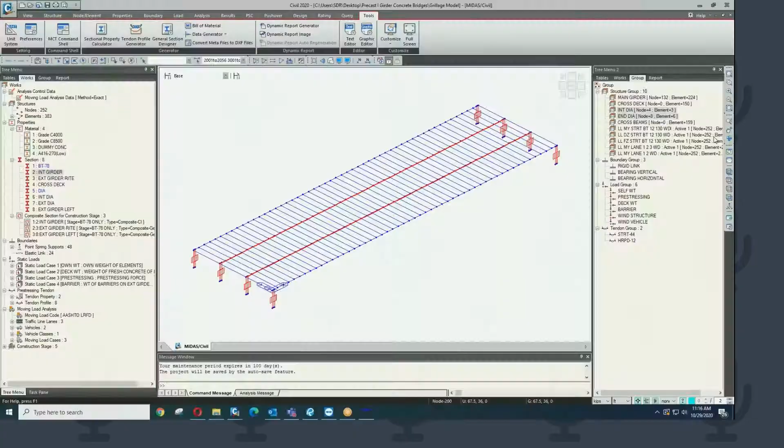Okay Hamid, thank you for your question. I think that's a very important question. Usually when you deal with composite bridges, either steel or otherwise, this issue is always something very important to consider. What stiffness are you checking your element for and under which load cases? So there are load cases where you need to check, I will not say short-term stiffness, but basically when you use the modular ratio, the regular modular ratio for the section.

What I mean by the modular ratio, of course, is the modulus of the steel over the modulus of the concrete. And when also you want Midas to understand that the long-term modular ratio should be used. So to me, when I do this thing, I usually go back to the definition of the section.

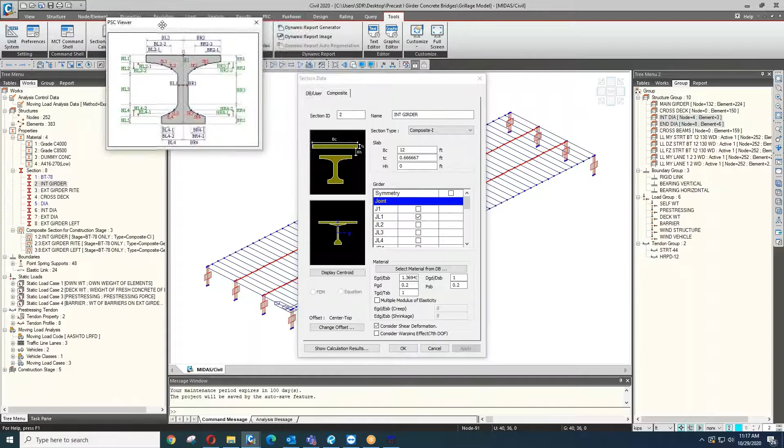Can you see my screen? Yes, I can see. So whenever we define that composite section, there is something that I think takes care of this issue that you brought up. When you define the composite section here inside Midas, you have part number 1, which is the girder section. Then you pick all the properties for the girder section here.

I'm sorry that I just jumped right away to this, but I need to give some quick introduction here, just so everybody can follow along.

So this example I'm showing you is just a precast concrete bridge, not a steel one, but I'll explain the concept and answer your question based on this bridge. This is a precast concrete bulb T section composite with the deck, and this is a cross section of the bridge. This bridge is composed of 4 girders, as you can see - those are the interior girders, and this is the exterior right girder and exterior left girder here.

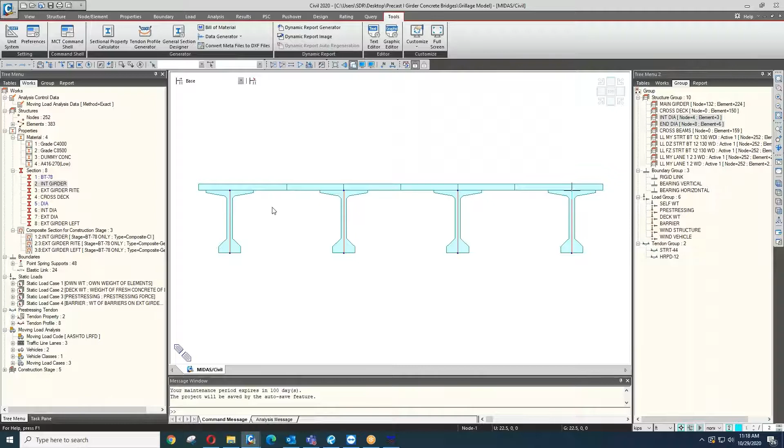So whenever I come to define the composite section here, I first define the section for the girder itself, which is the precast concrete girder in our case, and those are all the properties of the girder. Then later on, I jump to that window to define the composite section properties. Here you have the girder section properties defined, and then the slab part, which is the deck slab, with all the geometrical properties defined.

What takes care of your question is this part here - what modular ratio are you using. So this modular ratio, the modulus for the girder section over the modulus of the slab section - this modular ratio is 1.3 because we are talking about concrete here.

And this concrete, we have a grade for the pre-stressed concrete - this is 8.5 KSI, and for the slab it's 4 KSI. So that's why you can see the ratio is 1.36, but for steel it's going to be something on the order of 7 or 8 or whatever, depending on the concrete modulus you're using for the deck.

So this number here takes care of the short-term analysis or the short-term stiffness. So if I go now and analyze this bridge - I defined everything in this model, including the dead load, the live load, and the construction stages - if I run this model, this means all the cases are going to be checked for this short-term stiffness.

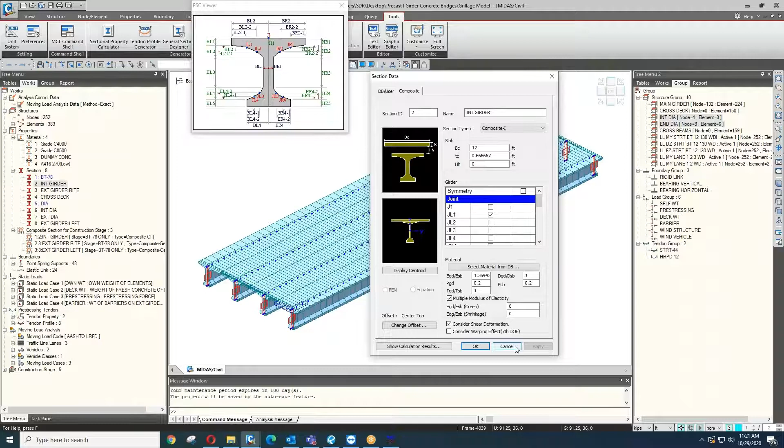For the short-term loads, including dead load and live load, and then for the long-term effect, when it's going to use this modular ratio for checking results for the cases that apply to the long-term effect. So I think this should answer your question regarding what modular ratio to use - this one for the short term, this one for the long term. I also see your point that the answer you got to your question is an indirect method to apply it.

If you go and define in the construction stages a dummy stage, I defined all the stages for the bridge, including the stage when I have the girder section only applied, then the stage when we have the deck weight applied after pouring the concrete - the fresh weight of the concrete on the girders - and then the stage when I activate the composite stiffness, meaning the deck stiffness now comes into action and is activated with the deck. So both the girder and deck are one piece, and the composite girder properties are activated at this stage. Then I apply the barrier load, and the live load will be applied on the composite section.

If you come here and apply another dummy construction stage, you can associate it with the section properties.

Here you see when I define the section for the construction stage, this is the composite section I showed for the interior girder. I always have the option to indicate that part number one, the girder part, is active at this particular stage, when we have the girder only applied in the structure. Then part number two, which is the slab, is active in the composite stage.

So you can always play with part number two. That's another way to define this long-term effect, if you want to do it the indirect way, not the way I just described for the modular ratio. If you want to do it this way, you can have a new section defined here and play with the stiffness of part number two to reflect the long-term effect, the creep and the shrinkage. You can use this section in this dummy stage, and then check whatever results you want on the long-term effect from this part.

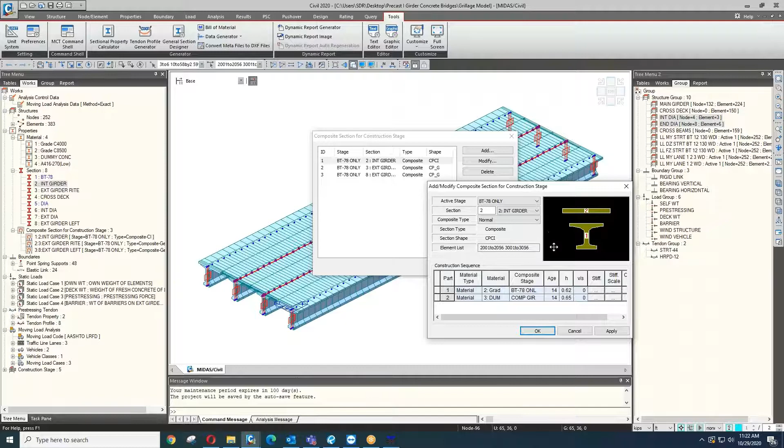So those are two different approaches. One, I'd say the more direct approach, is considering the long-term effect while defining the modular ratio. I think this is better and easier because I believe this is taken into consideration by Midas - otherwise they wouldn't include those cells in the first place.

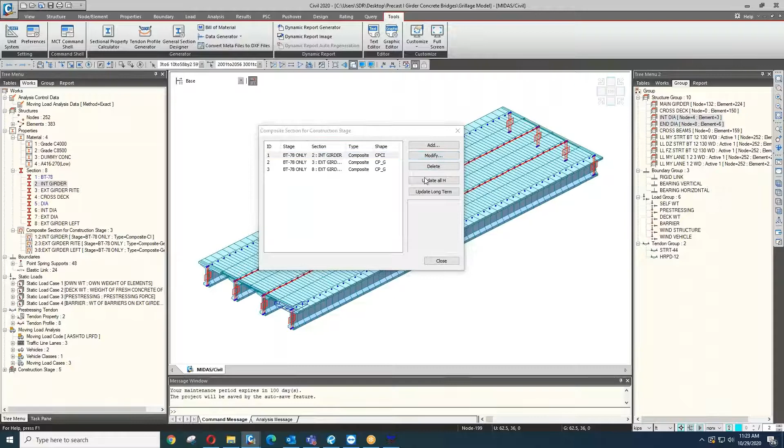Or the other way, the classical way, is to add a dummy construction stage and associate with this stage the definition of the section. You can have your composite section reflect the long-term stiffness, and play with part number two to reflect the long-term stiffness, activating part number two in that dummy stage you add. This way you can also take care of the long-term effect or creep checks. So I hope this answered your question so far.

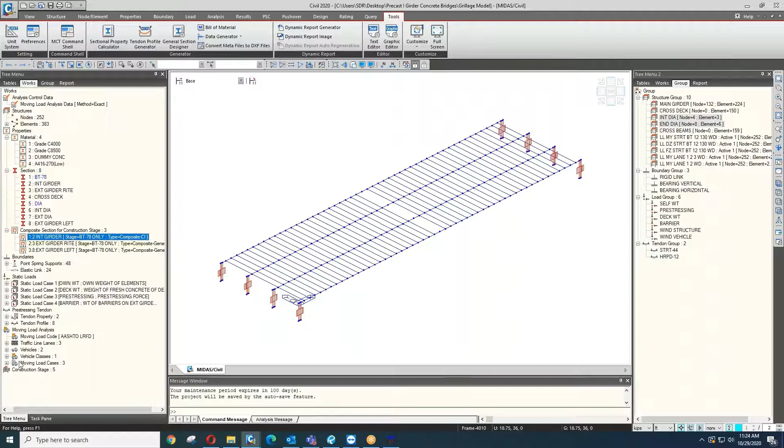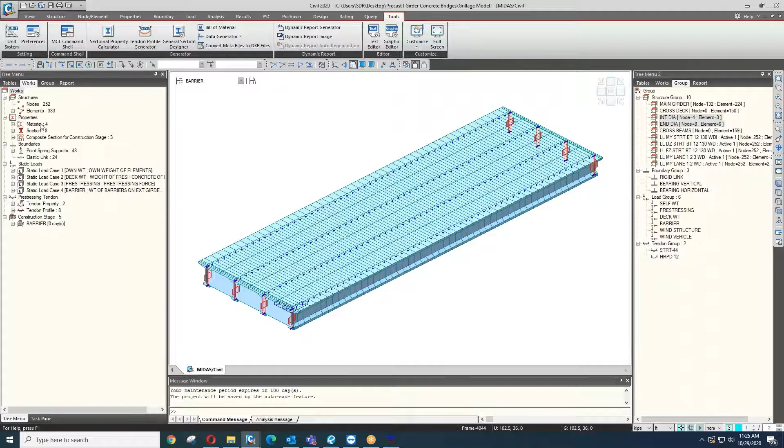Hamid? Hamid, do you have any follow-up questions? Yeah. I cannot hear you. Okay, yeah, I guess his mic is open. I'm not sure what audio issues he's having, but meanwhile it seems like Buddy has a question in the chat box. Hello? Yes, hi, can you... Buddy. This is Hamid speaking, actually. Oh, this is Hamid, sorry.

Hello? Thank you, Amir, for your explanation. Can I talk? Oh yes, Hamid. Yeah, you can go. Actually, Amir, thank you so much for your explanation. But my problem is that based on...

What you did now, I agree with, but following this approach, Midas will use the long-term section properties, taking into account creep, for analyzing the live load. So if you find the deflection of your beam at the middle due to live load, this deflection has been determined based on long-term properties, with the way you just defined your construction stage. To investigate it, you can simply change the long-term properties of the concrete, and you'll see the deflection will change. So it means Midas is using the long-term properties.

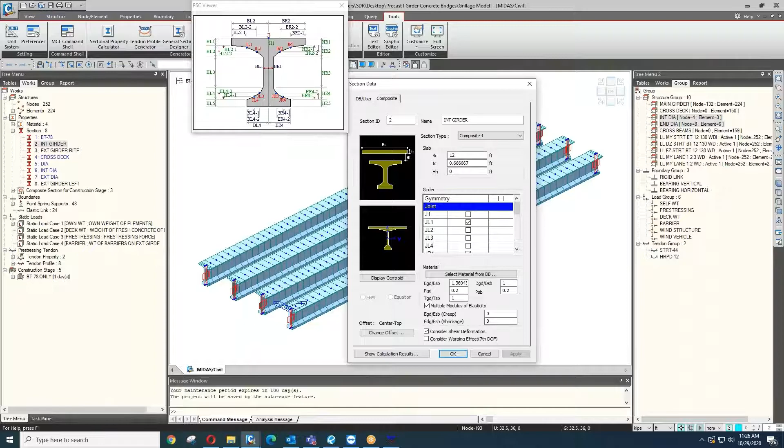For example, in the window you're showing us now, if you change the creep effect multiple modulus of elasticity - set it once equal to 1, then equal to 2, 3, 4, whatever - and compare the deflections of the beam, you'll see Midas gives a different number every time. Because of the way we've defined the different stages, Midas uses the long-term property at the end. So you can investigate it.

So it means I get your question about this, and that's why, honestly, for the bridges that I worked on, I was always using the short-term modular ratio here whenever looking into live load analysis and all those cases.

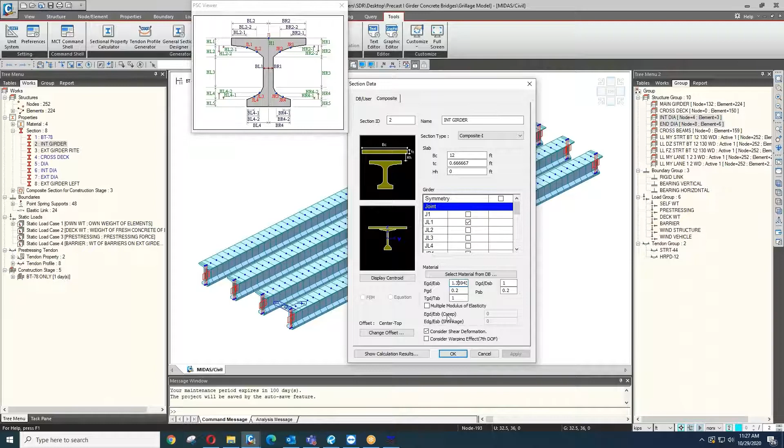If you want to control it, you can have a construction stage that only reflects the long-term effect under dead load. You define a dummy stage to associate with the long-term effect, so you always know you're only looking at this stage for the dead load only, not any information from the live load case analyzed based on this stage.

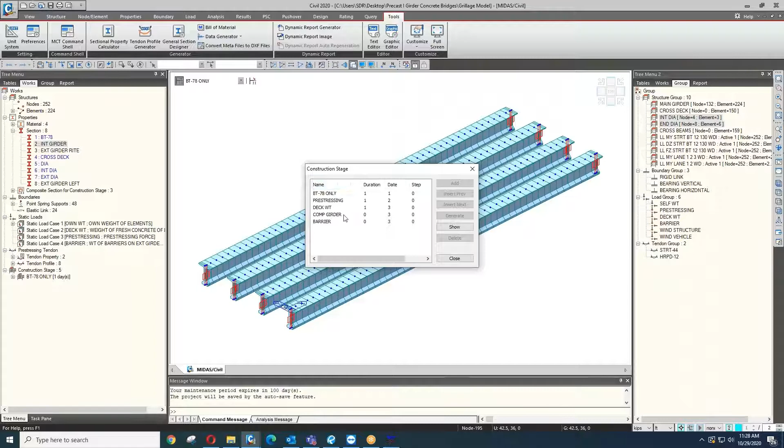Usually when you define load cases, you associate the section you're using. For example, this section uses short-term properties or stiffness, so I know it's good for live load analysis and can extract live load results from it. But if I define a section that accounts for the long-term effect property and rerun the analysis based on that section, I'll only use this data for the dead load cases, not the live load.

You can also end up doing two models, Hamid - having one model using the short-term effect that you know to use for live load analysis, and another with the long-term effect that you use for the dead load effect, if you're more comfortable doing it this way.

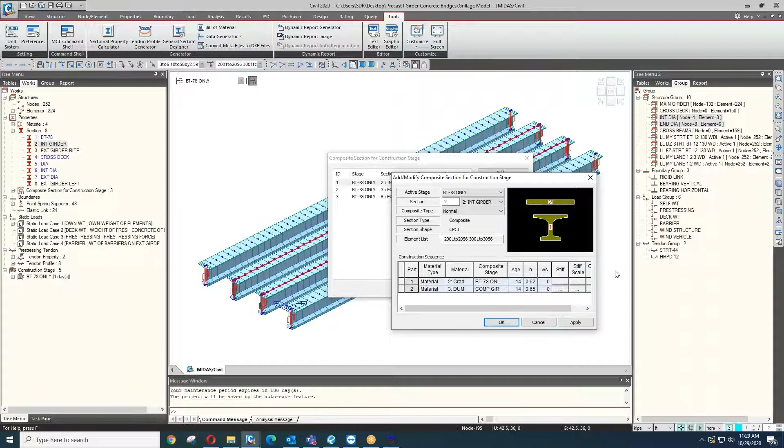I had a long conversation with the Midas support team, and this is what we ended up with. If I can share my screen, I can explain the outcome of my discussion with the Midas team, and then get your opinion on that.

How can I share my screen? Is there any way I can share my screen? Yes, you should have a pop-up window. Hamid, do you see any pop-up window? I think so. Okay, we see your screen now. You can see my screen.

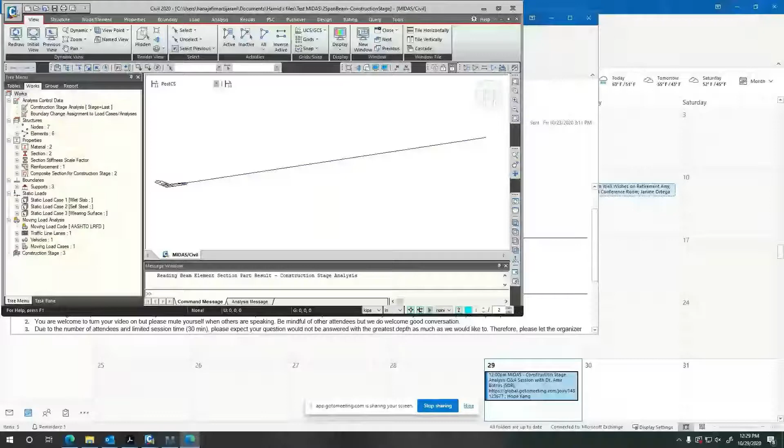So here I have a two-span composite beam.

We can see your email screen, not the model screen. Yes, so this is my... can you see my screen? No, you have to change the screen you're sharing - right now we're seeing your Outlook. Okay, can you see my screen now? Yes, okay, thank you, sorry about that.

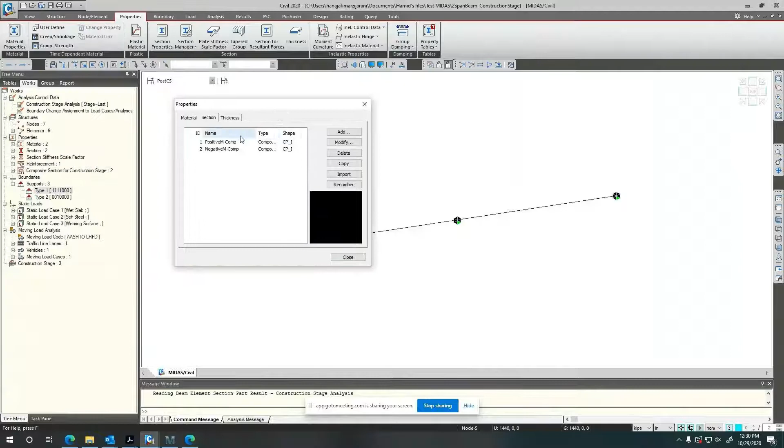In this case, my composite girders are steel composite girders, but as you said, the issue is the same. This is my composite beam - I have a steel beam as the basic beam, with concrete above it. My goal is to use a single model to analyze both dead load and live load.

That's why I've defined multiple modulus of elasticity - as you said, here I have n, and here I have 3n. In this case my n is larger because my basic beam is steel, but in your case your basic beam was a concrete beam, so you had a smaller value - it's a different section.

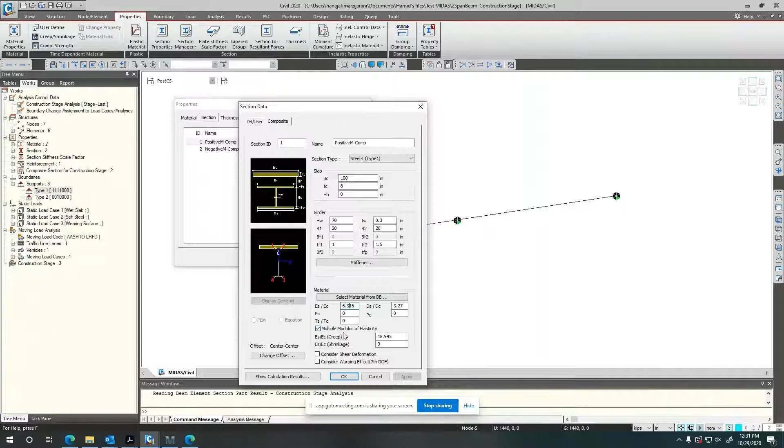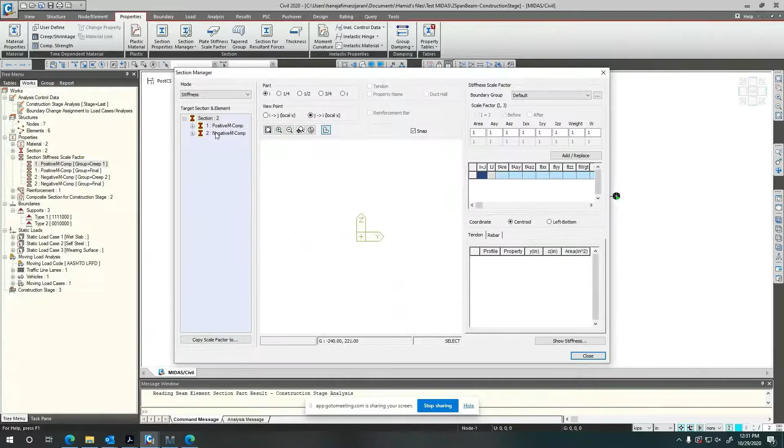When you activate this multiple modulus of elasticity, Midas will create some sections - as you know, you can investigate it - in a menu called section stiffness scale factor. If you open it, you could see, for example, here I have for positive... you could see you have different...

Oh, excuse me. Let's see. So I have to open it one more time.

So you can see that you have actually different rows. Forget about these two rows for now, I'll explain them more. Midas will automatically define these scale factors.

These scale factors are actually the ratio between the short-term and long-term properties. For example, this parameter factor IYY, if you forget about these two rows, is actually the ratio of the moment of inertia about the major axis for the short term, computed based on n, divided by the moment of inertia for the long term, computed based on 3n. That's why they are smaller than 1.

So this is a factor for I about the major axis, for I about the minor axis, for cross-sectional area, and other properties of the section. So this is the way that Midas will consider creep or long-term effect.

This is the way that Midas works, but if you leave it like this and analyze your model and define construction stages, Midas will use these long-term properties even when analyzing the bridge under live load. So the deflection or the forces, bending moment that you are getting are all based on a long-term effect that are not true.

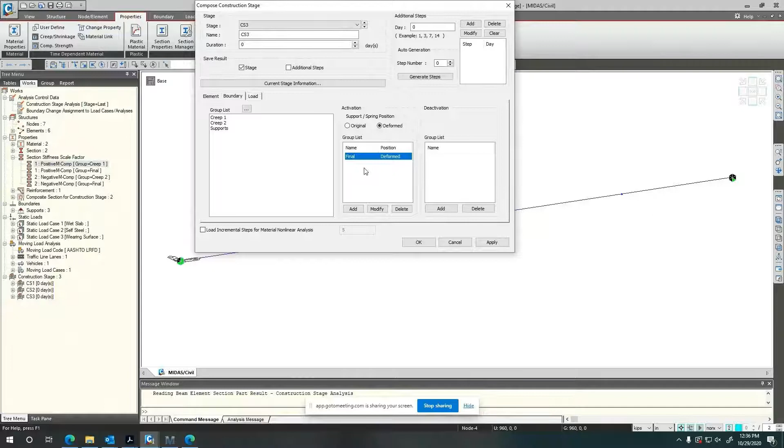So this boundary condition, which I named 'final', is this. In group, I have defined a new boundary condition called final, and then I'm going back to this menu, to this option, section stiffness scale factor.

If you open it, you can see that in addition to the for-each section, in addition to the two first rows that are the parameters I mentioned, scale factors take into account the long-term stiffness, the creep effect. One of them is I, and the other is J. The first row is I, the second row is J. I is the beginning of the element, and J is the end of the element.

So I have added two more rows here, and as you can see, I have modified all numbers to 1. The boundary group here is final, as you can see. For the first two rows, the boundary group is creep 1, which corresponds to what Midas itself automatically defined, and now this is what I myself have defined. I have defined the final, and then I have changed everything to 1. I have done it for all composite sections.

So for all composite sections, I have two different sets of numbers. These numbers consider the long-term effect, and these numbers change the stiffness so that you will use the short-term stiffness. The first two rows represent the long-term effect, and the last two rows represent the short-term stiffness. These are what Midas automatically defines based on, as I said.

If you go to the section properties here, and show calculation results, you can see that Midas had 3 different values, or even 4 for shrinkage as well. You have before composite action, after composite action, and long term. These are based on N, the second column, and the third column are based on 3N. So the factors that I showed you are nothing but, for example, this column divided by this column.

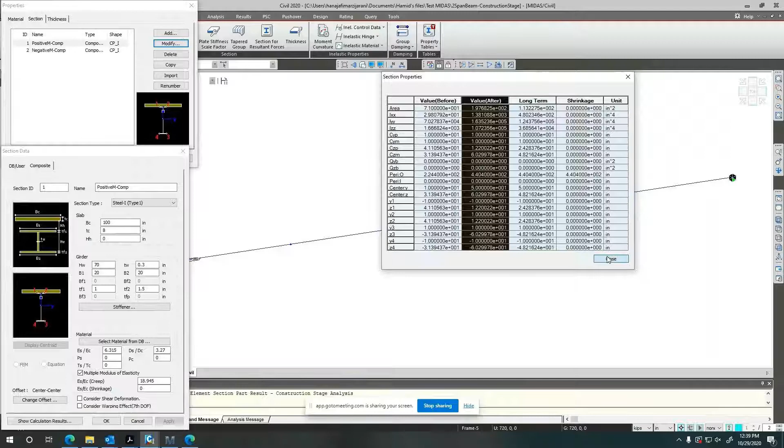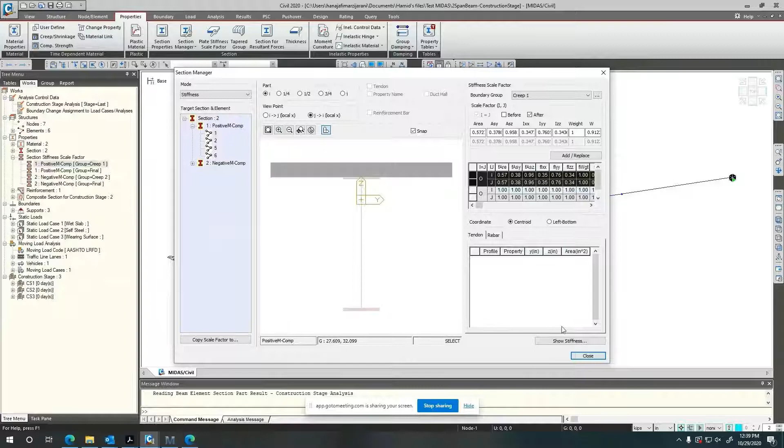So now, in order to have the correct values for the post-construction stage, they recommended that I just need to come here and add these additional factors, and then they belong to boundary group final. Whereas the first two rows belong to creep number 1 for this section. This is what Midas defines when you activate this option. Yes, this one. If you check this on, then Midas automatically will define the section stiffness scale factors for each section that you are defining.

So in construction stage, you just need to add this dummy stage and then modify. The only thing that you will activate is this final group. This final boundary condition. So I have actually examined this approach, and I have learned that if you do this, Midas will correctly use the short-term stiffness for live load analysis.

And for any post-construction analysis, it could be earthquake, it could be live load, it could be wind, and it will also use long-term properties for other dead loads, such as wearing surface, or barrier loads, or whatever we call dead load after composite action. So this approach will be consistent with AASHTO LRFD.

This is what, after a long conversation with them and back and forth, we ended up with. So let me comment here and say that this is really a very good, excellent approach to trick that issue that we have inside Midas.

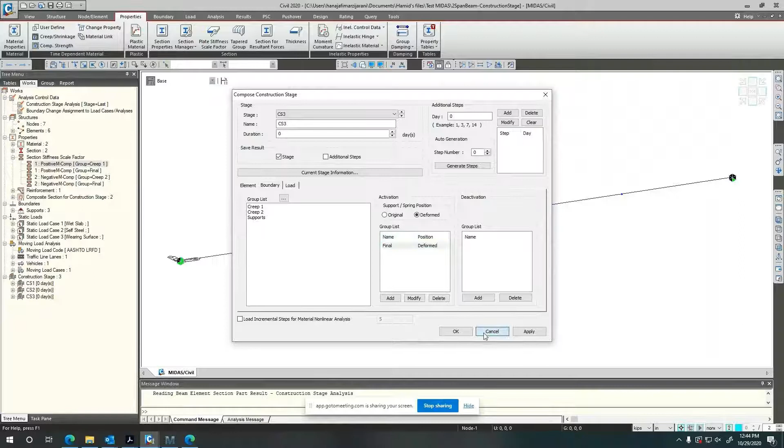So the question is, based on AASHTO, imagine we have a simply supported beam, and the beam is always composite. For a simply supported beam, we always have positive moment, meaning the concrete is always in compression, so we are not worried about cracking of concrete due to tension. But if you have a two-span bridge like the one I showed, near the mid support we have negative moment, meaning the top of the section is in tension, so the concrete will crack, and we only have the steel and the reinforcement above the section, if any longitudinal reinforcement.

So based on AASHTO LRFD, when we are determining the capacity of the section, or computing the stiffness, in the negative moment region we disregard the effect of concrete and assume we only have the steel section alone. That makes sense because the concrete has cracked.

Correct, but the issue is when we are analyzing the model to get the existing bending moment and shear force due to live load, dead load, etc. I looked at AASHTO LRFD, and it explicitly mentions that to analyze such a case, you do not need to consider cracking - you can assume you have the composite section along the entire length of the beam without considering the crack.

So you use the composite section in both negative and positive moment regions when you analyze your model, and you get the bending moment in the negative moment region. But when computing the capacity or the stress, you actually use only the steel section. So I wanted to double check with you if my understanding is correct, and hear your opinion - I think there's an inconsistency here.